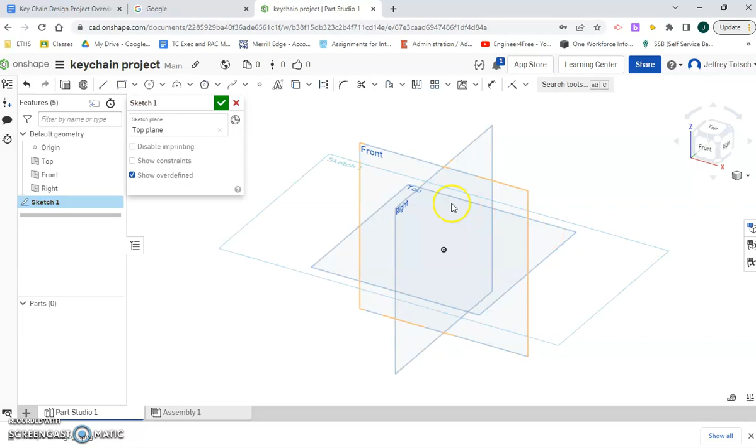I'm going to go to my OnShape, create a document, and call it Keychain Project. Just going to start off. Remember, we pick our sketch plane and then we orientate ourselves to look at that. All right, and we're simply going to make a 2.5 by 2.5.

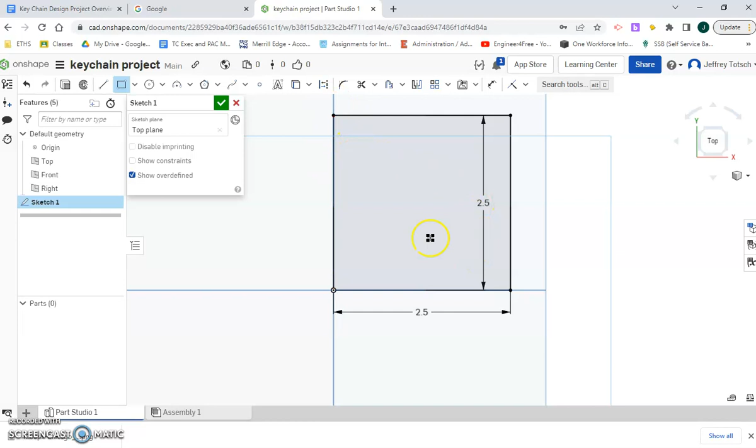Constrained off the origin, so it's 2.5. Note that our keychain needs to go in here. And so, depending on what you wanted to do, if you wanted to make it in the middle of this, we could build off of this. All right, we could use circle, the polygon tool.

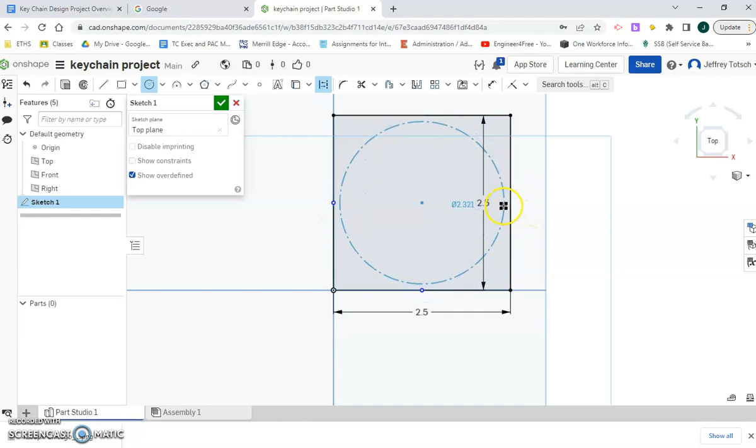If I wanted a circle in here, go in here and circle with the 2.5 diameter, and all right, so we could switch it back.

I could maybe do a polygon, just to get used to using Onshape. A polygon that fits in here, but no matter what, we want to make sure it fits in our 2.5 by 2.5 box. So I'm just going to stick with the circle.

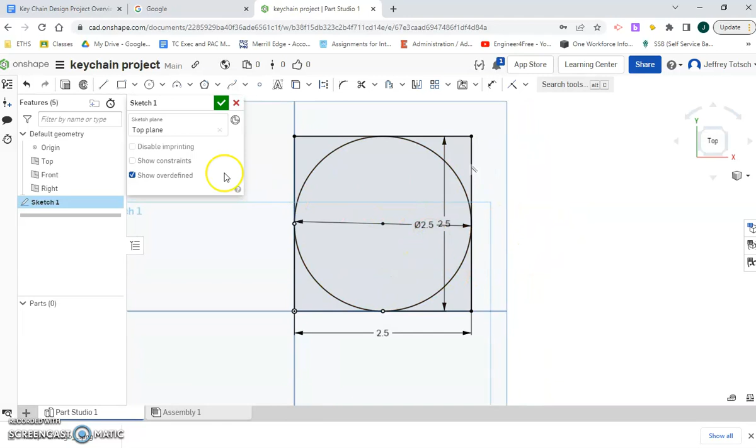We'll ignore the square. And remember, we're kind of building up layers upon layers. So if we were fine with being a circular keychain, we could simply hit Finish Sketch, extrude, and build it up to be a certain thickness for this part.

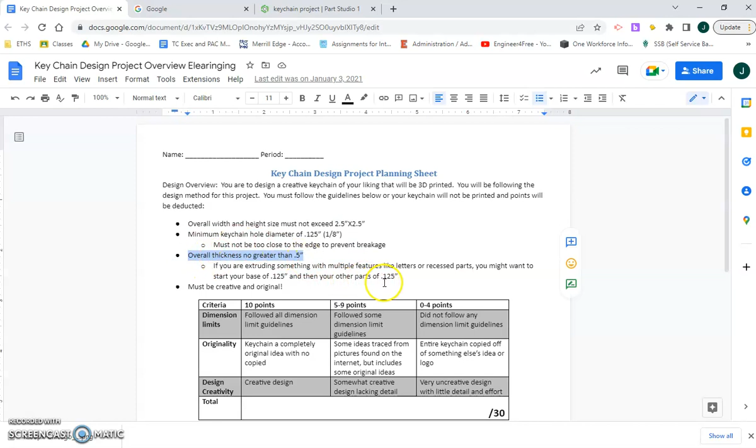And we look at our constraints, we cannot exceed 0.5 inches for our overall thickness, and it has a little hint down here that you start off your base at 0.125, or 1/8. We could build from there, so let's do that, 0.125.

Check, and now build a 0.125 base. So now we create a sketch. We could click the face of this extrusion we just made and go to the top view, and now we could kind of freehand draw anything that we wanted, going off center of the circle, again using Onshape.

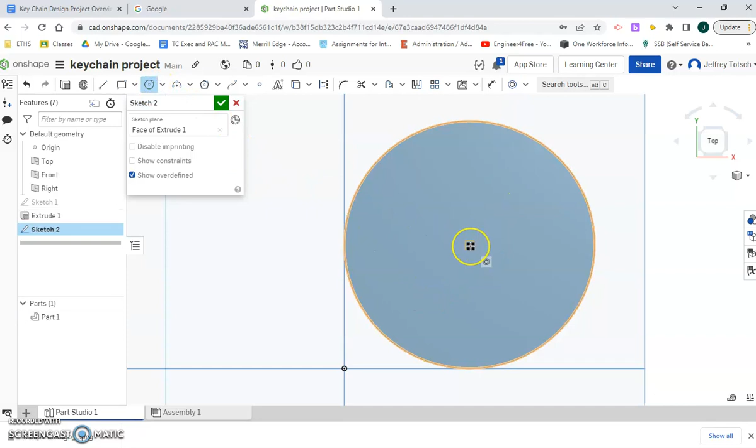Construction line. All right, there we go. So I got this off my midpoint, so I can make a pattern, whatever you like.

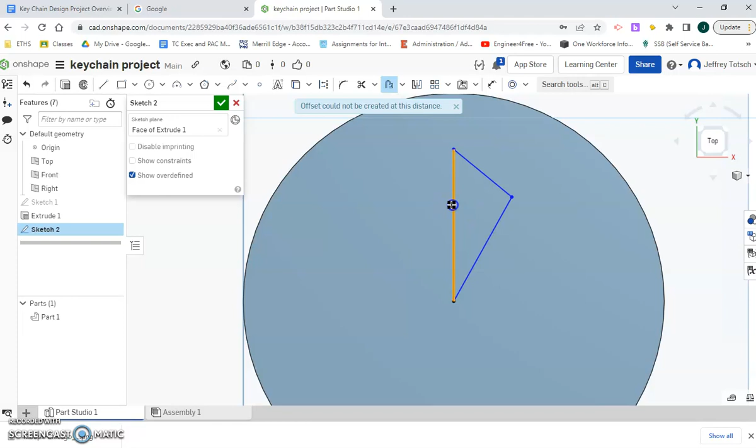And we have some neat tools that are hiding up here. We have offset, which if I hit offset, puts something a set distance away. So let's see offset in action. We have all three of those and distance.

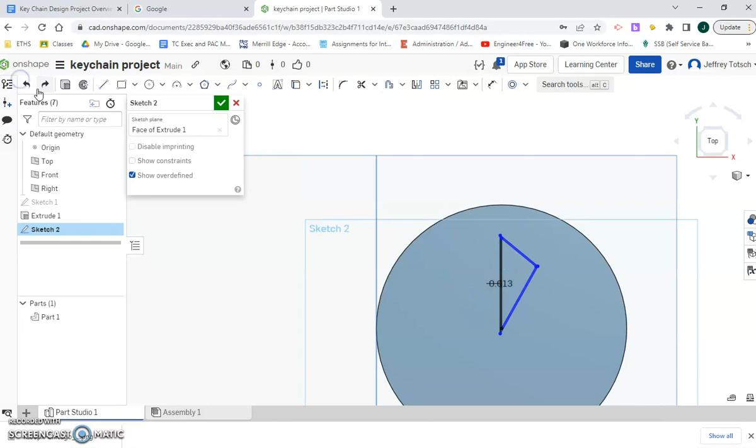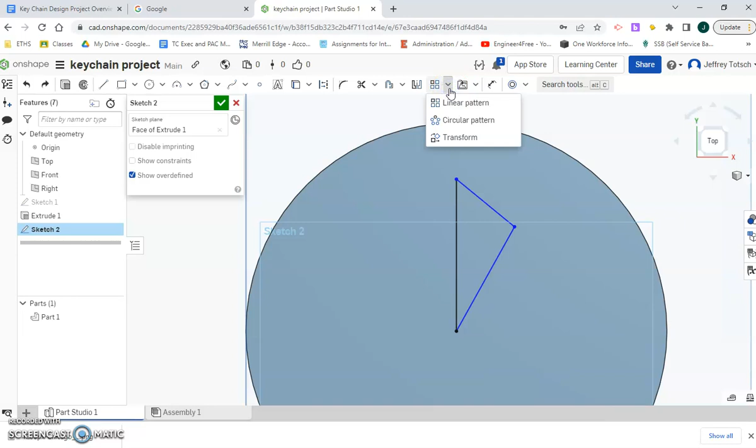Also use the mirror tool. But the other thing that's neat is I could use this pattern, and this would make it in a rectangular pattern.

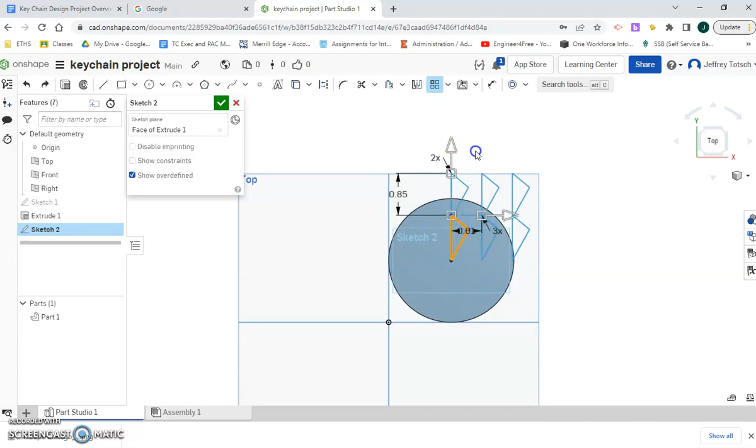Select how many we want to make, how far apart they are from one another. We can make that shape, but what I want to do is I want to do a circular pattern.

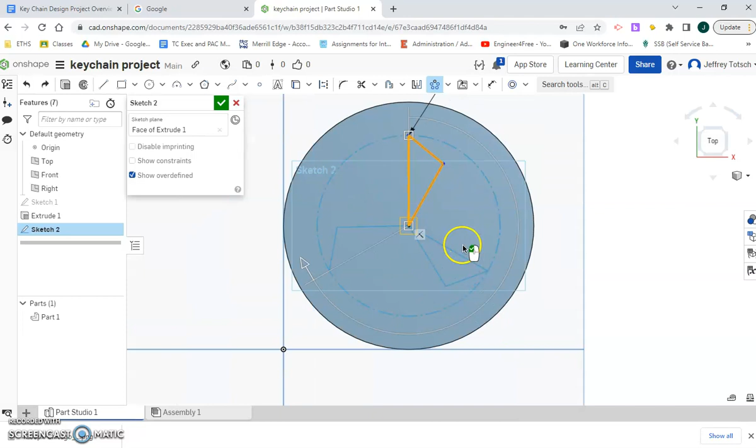Notice how it default selected this as my center. Let's go right here and make it the center there. Right now we have 3, let's change this to 8.

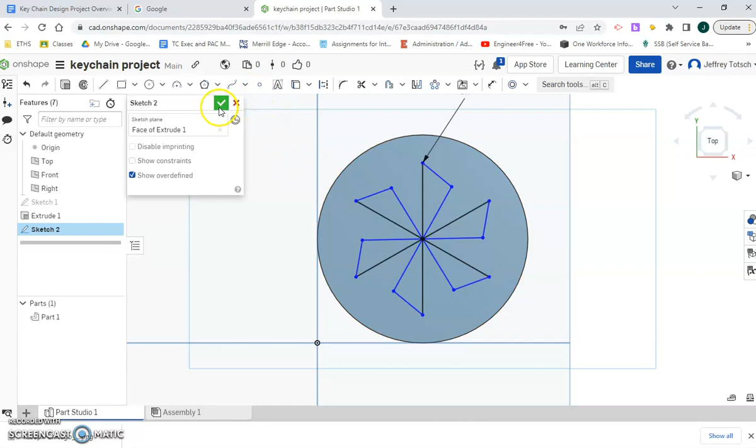Going with this, so I kind of made a windmill pattern. I took and I arrayed this triangle pattern around the center of this. So I'm going to stop there with my sketch, and again, now I could extrude.

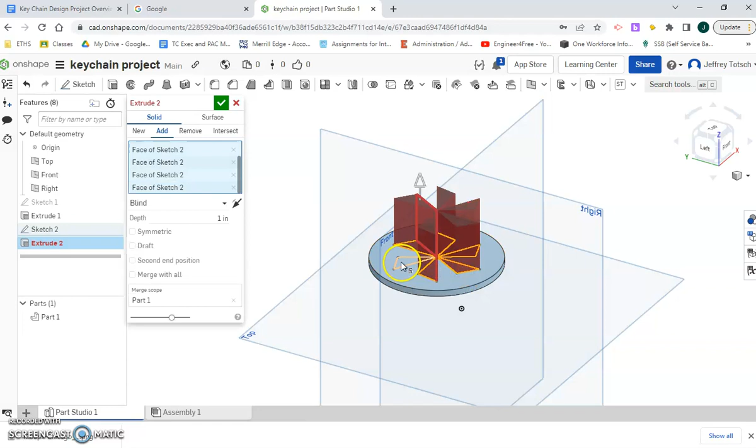The other side, so let's try this again, extrude. Got to change it to new. And again, we could do it layer by layer, 0.125.

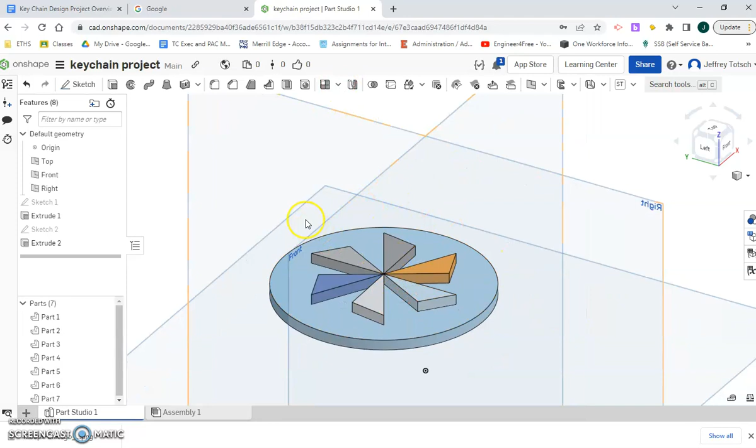Now we have other things we could do. We could round our edges if we wanted to. All right, let's put a fillet on this edge. Let's see what a 0.125 fillet would look like on that.

Put chamfers on our edges. If we wanted an angular face on that, and that's a pretty intense one.

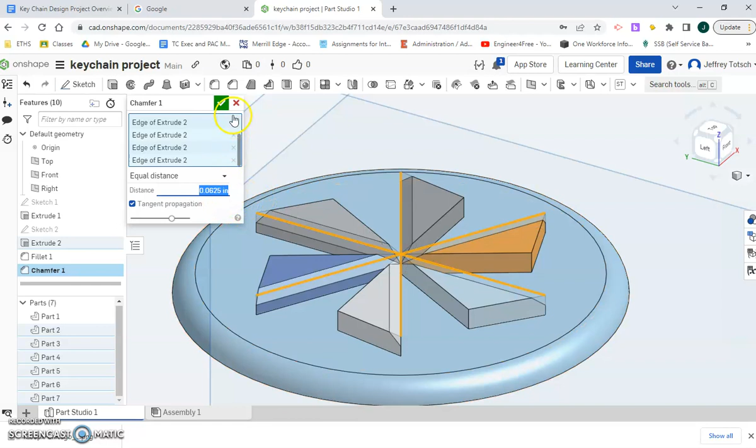Careful because it will... I've picked off, see the angle's a little less. Let's go half of that, 0.0625, for chamfers on it. So there's stuff we could do, and you can make your own pattern.

1 and 2, I could even put some text on here. Let's put text on the back.

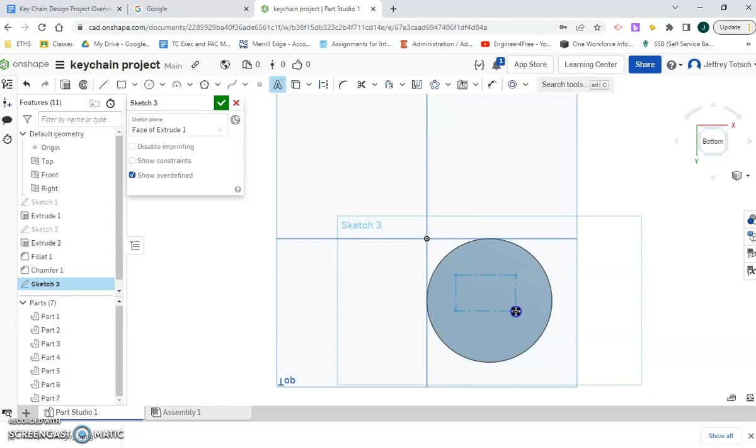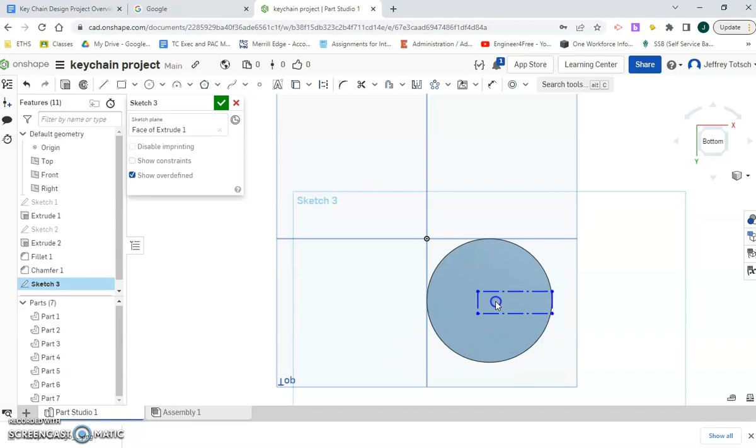And we could take it here, right? Add a constraint. You got to be careful because it will constrain itself where it wants, and bring it on there. We could rearrange it in motion.

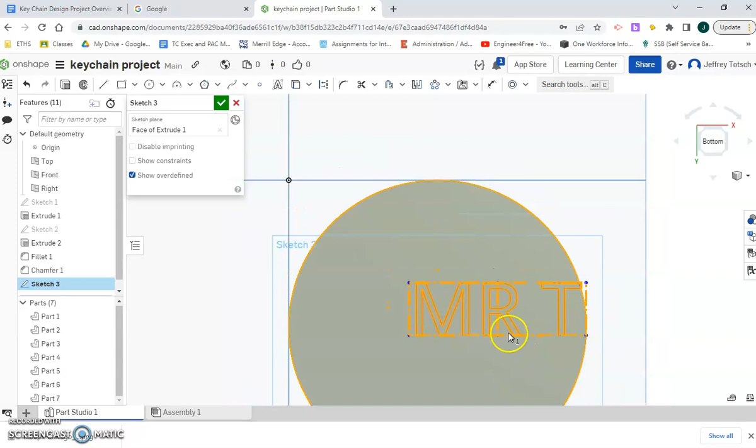Once I find a place for it that I'm happy with, we could do our letters. And the neat thing is you could have them come down, 0.063.

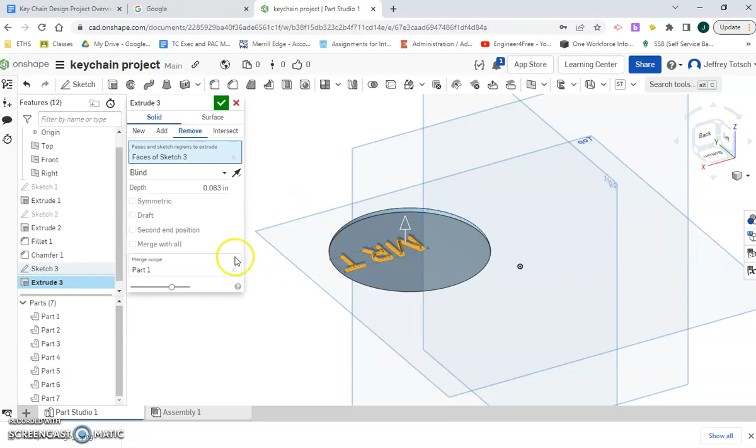In. Now I didn't go all the way through, I just kind of engraved it.

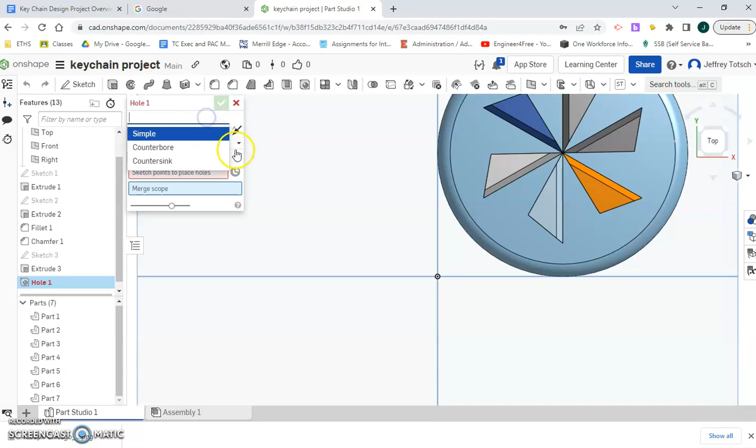Last thing I'll do is we got to put our keychain hole on it. To select points. So we create a simple sketch on the plane, and use a circle, make it 0.125 at least.

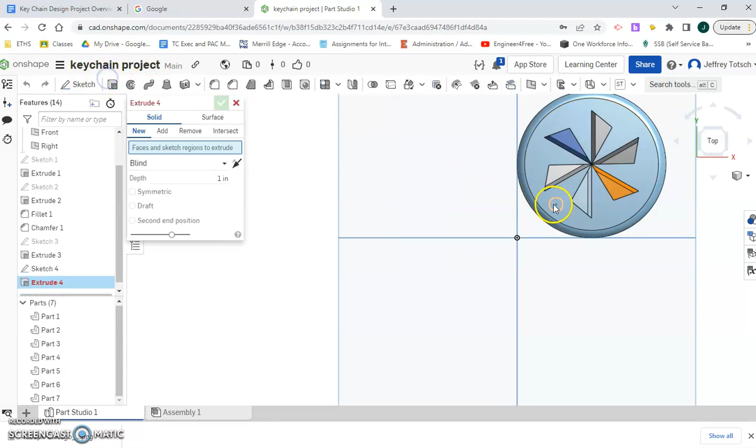All the way through it, we could change it to just go. That's one way we can make our keychain, by simply creating sketches and extruding them.